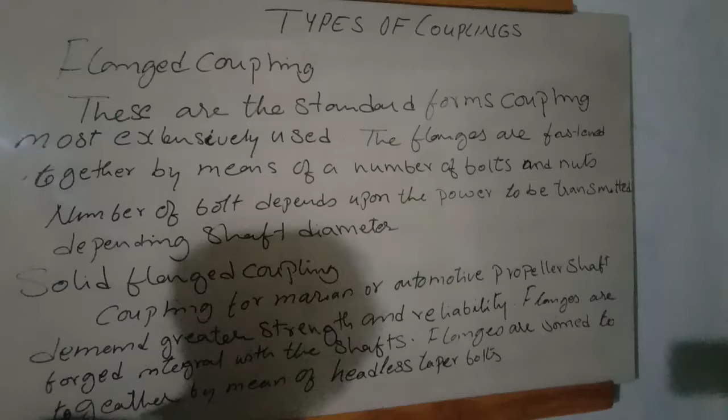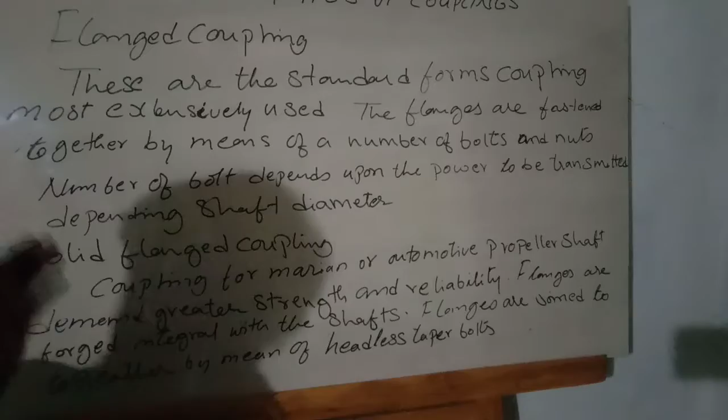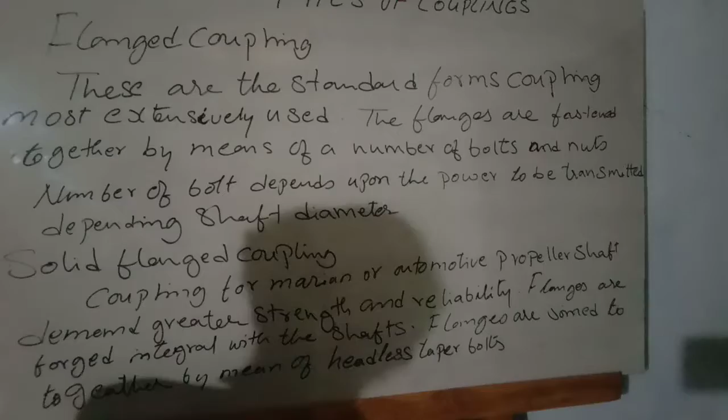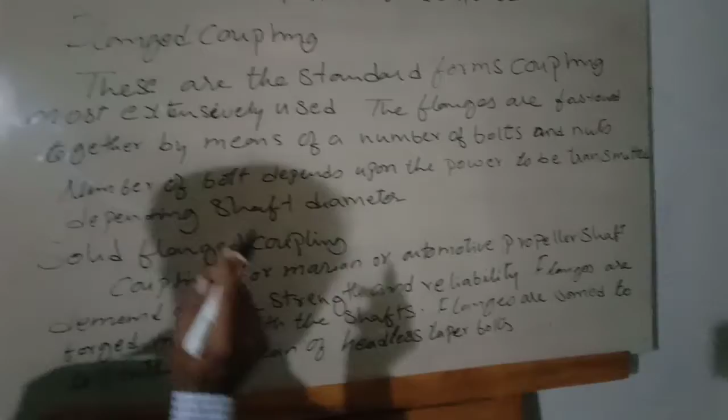Now we are going to learn about the flange coupling. These are the standard form of coupling most extensively used. The flanges are fastened together by means of a number of bolts and nuts. The number of bolts depends upon the power to be transmitted and also on the shaft diameter.

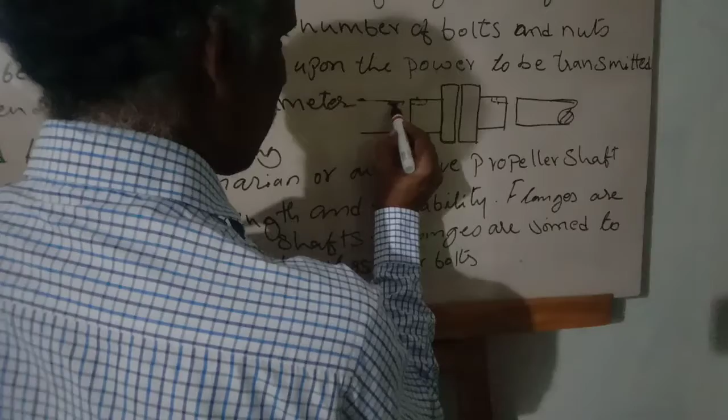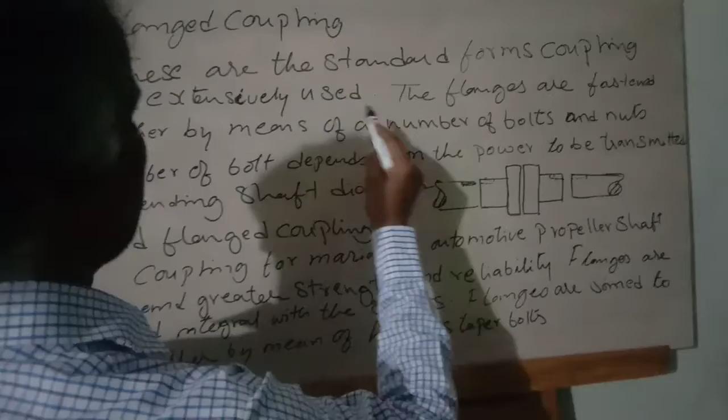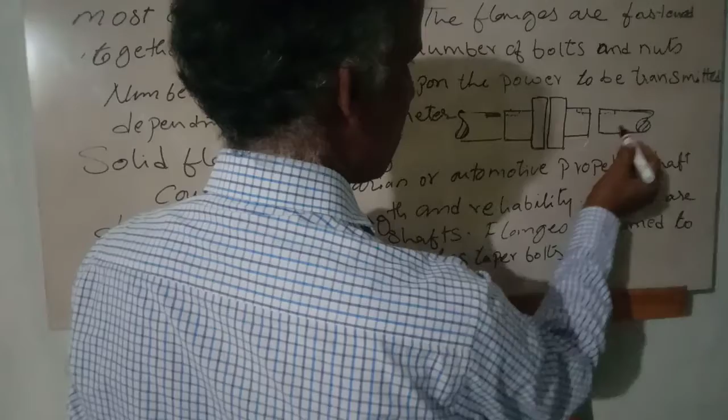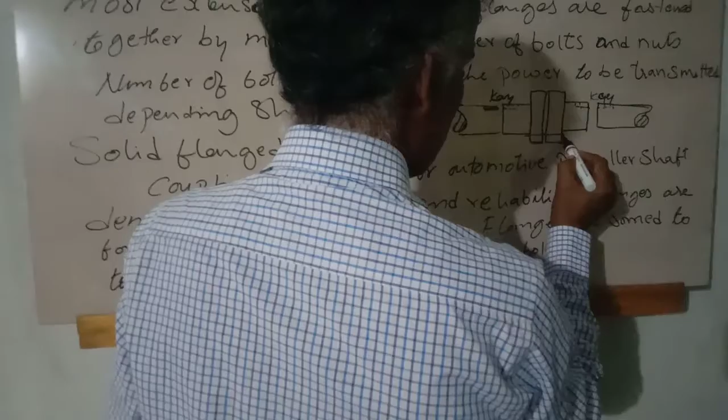This is a flange, the standard form of coupling mostly used. The flanges are fastened together by means of a number of bolts. In the flange, the shaft is inserted. The shaft and the hub run together with the help of inserting the key, here and here also. After inserting the shaft and fixing with the key, the two flanges are fixed by nut and bolt.

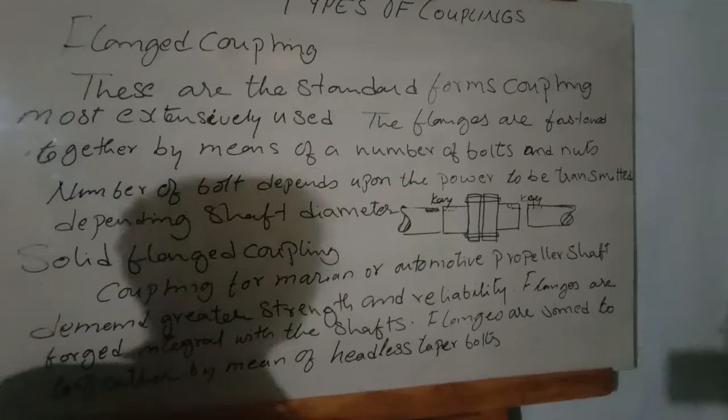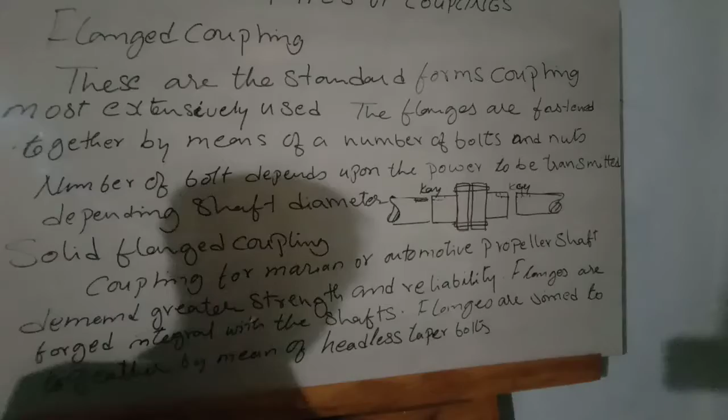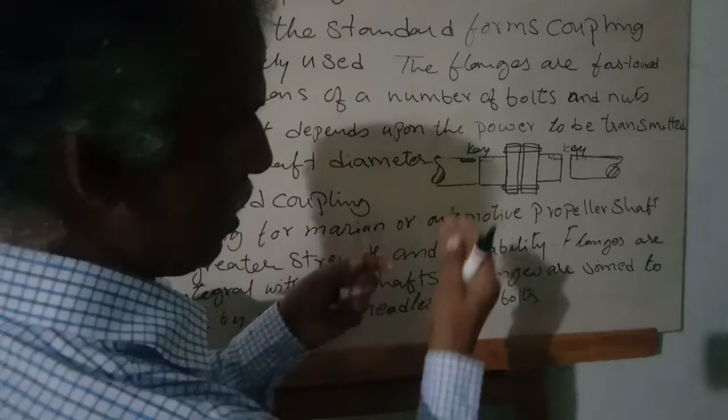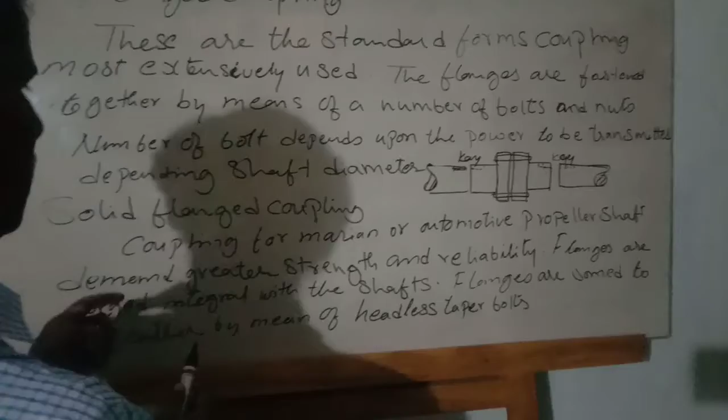Number of bolts and nuts are used. Sometimes they use 6, sometimes 4, sometimes 8, multiple numbers. It depends upon the shaft diameter, power to be transmitted, load, capacity, and the diameter. Keeping this in mind, due to tensile force acting when the two shafts are running, sometimes these bolts are sheared off. If the number of bolts is less, the load will be more on the nut and bolt and it will get sheared off. That's why the number of bolts and nuts used depends upon the power to be transmitted and the shaft diameter.

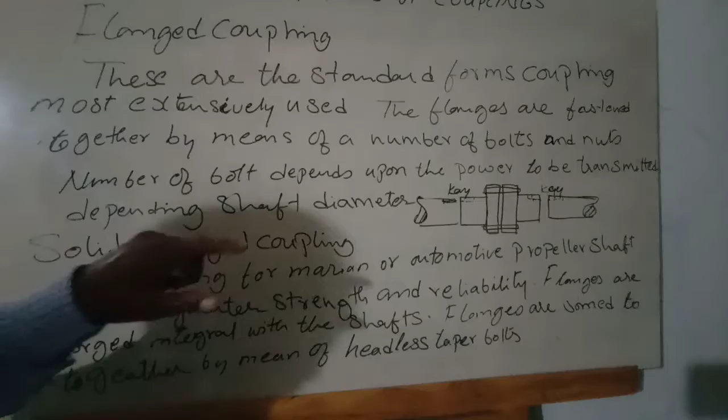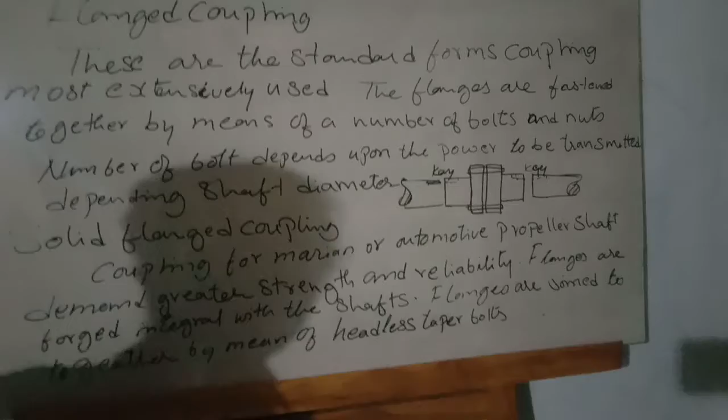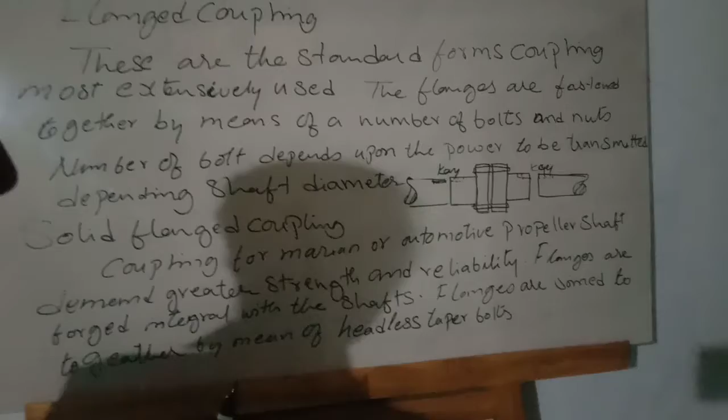This is a flange coupling. Sometimes in this flange coupling they use, in between these two flanges, some synthetic material like plastic, rubber, or leather piece to avoid the sound due to running and slackness, so it will not cause the pollution of sound.

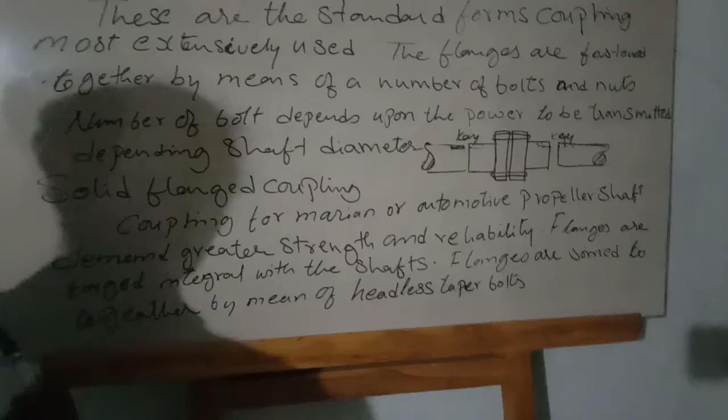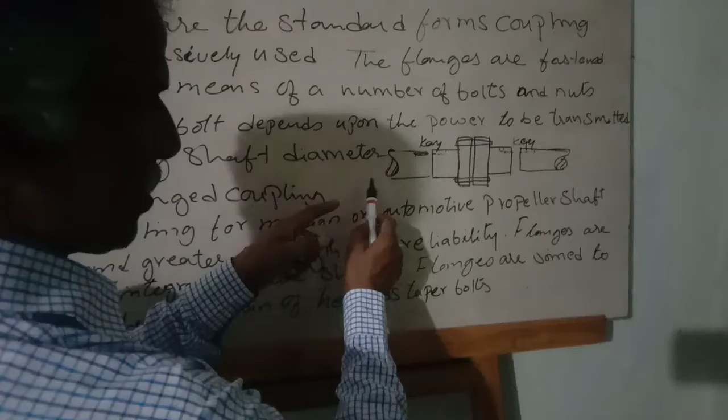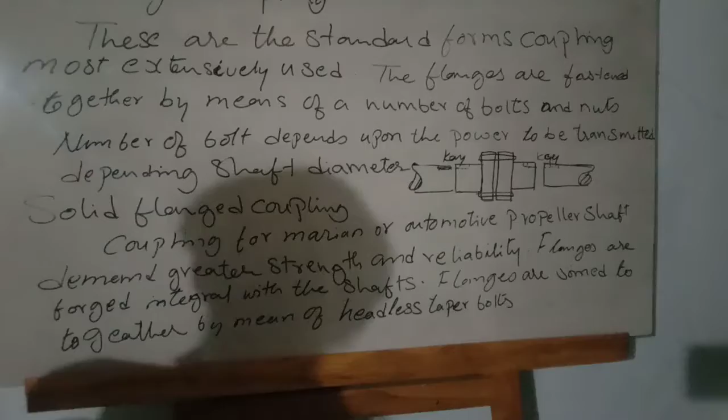Solid flange coupling is similar to this coupling, but whereas in the flange coupling the flange is separate, the shaft is separate, and nut bolts are fitted with a keyway and keys, in solid flange coupling these are mainly used in marine and automobile propeller shafts.

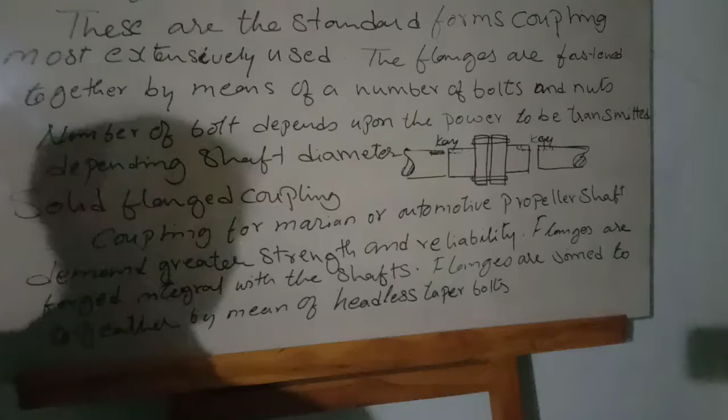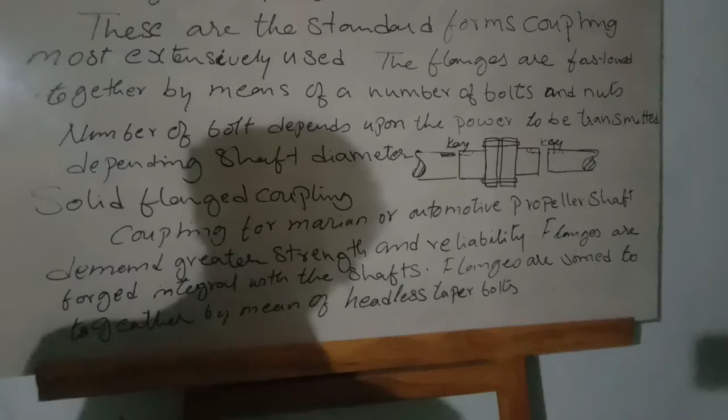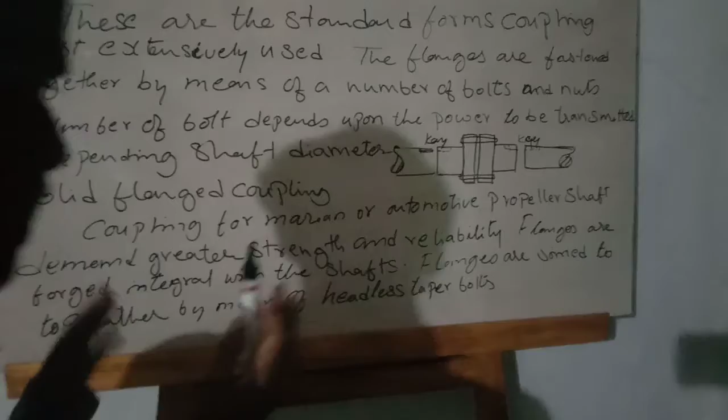Marine means on the sea, ships, big ships and marines. Automobiles, buses, cars, everything - these shafts, two shafts, are coupled with a solid flange coupling with flanges. These flanges are an integral part of the shaft.

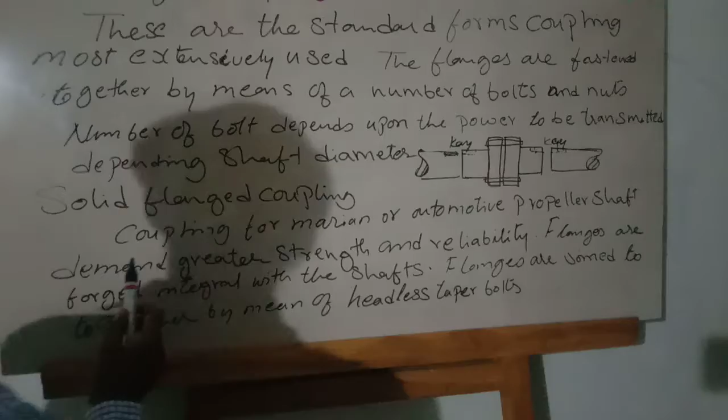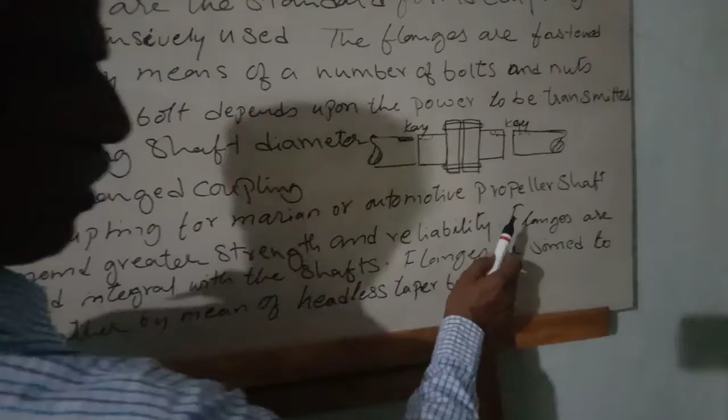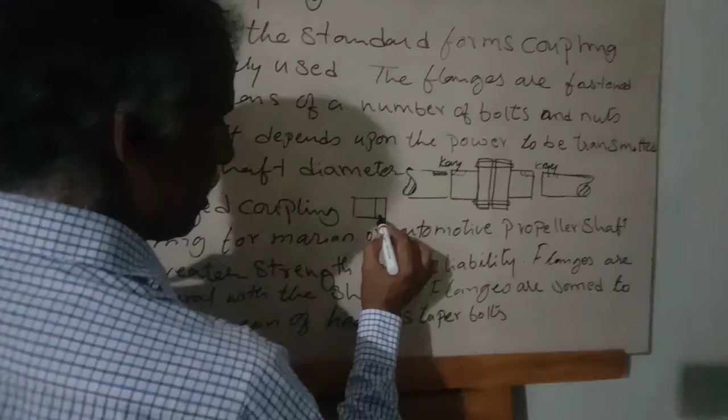Here the coupling for marine or automotive propeller shafts demands great strength. These solid flanges have great strength and reliability. The flanges are forged integral - integral means they take one shaft, heat it, and make it into this shape by forging.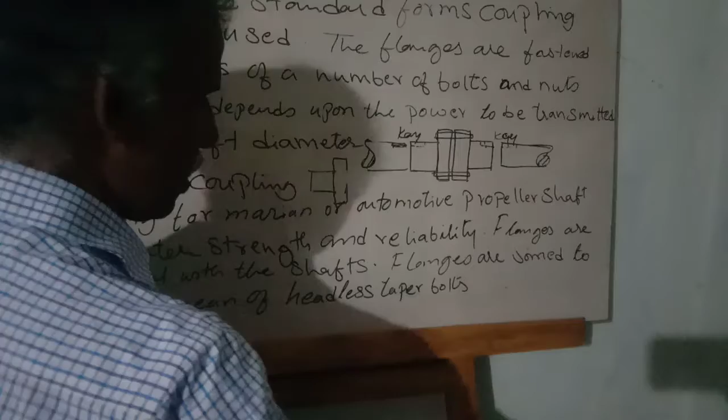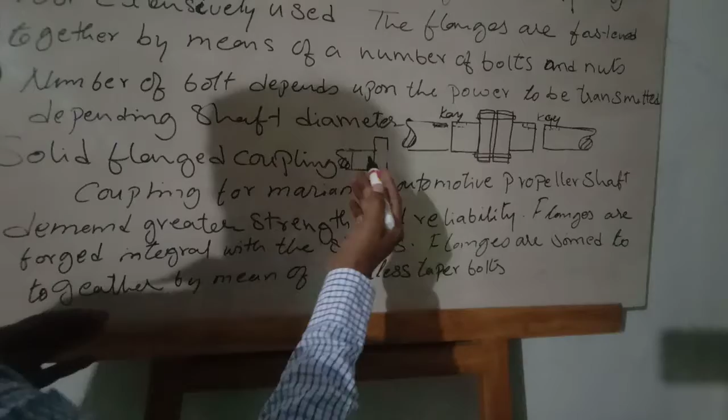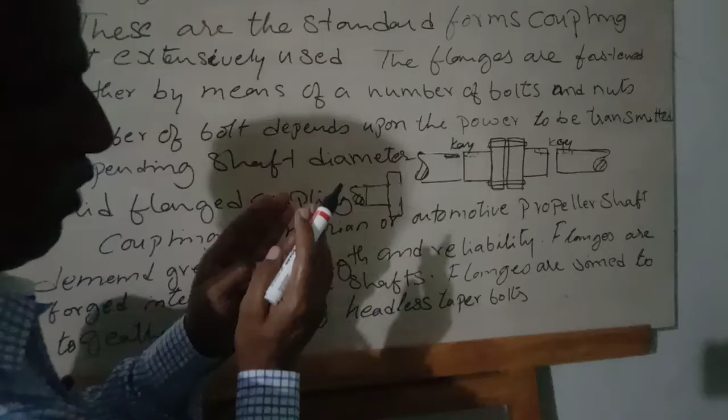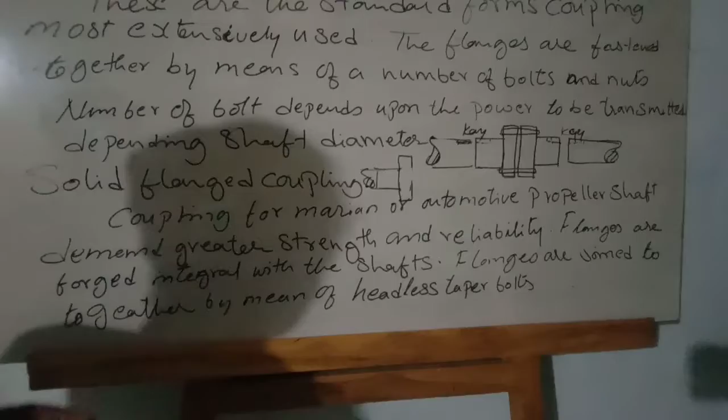So the flange and the shaft are an integral part, one part only. So the shaft is merged with the flange on both ends - both shafts are integral with their flange, both one piece. Now these two flanges are fixed together the same way as in the flange coupling, with nut and bolts. This also depends upon the diameter of the shaft - load has to be transferred, power has to be utilized, depending upon the shaft diameter.

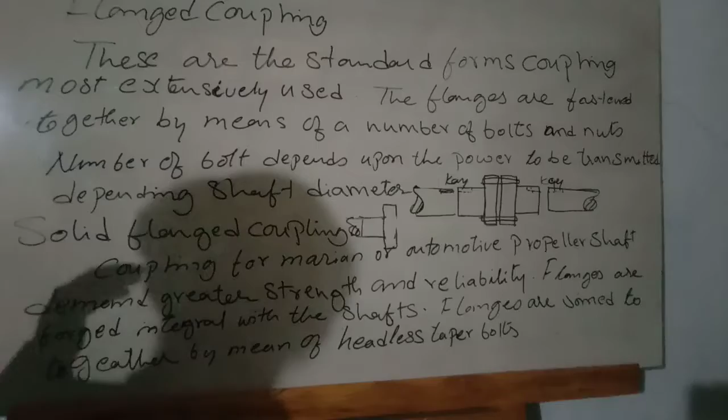Difference between flange coupling and solid flange coupling: in flange coupling, the flange is a separate part and the shaft is a separate part. Whereas in solid flange coupling, it is an integral part with the shaft. The coupling is made by forging.

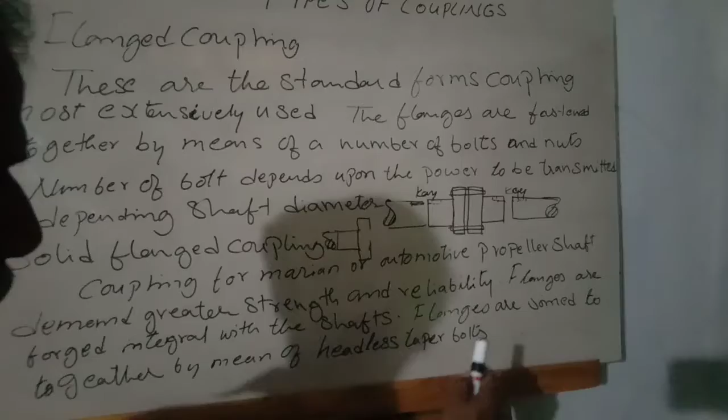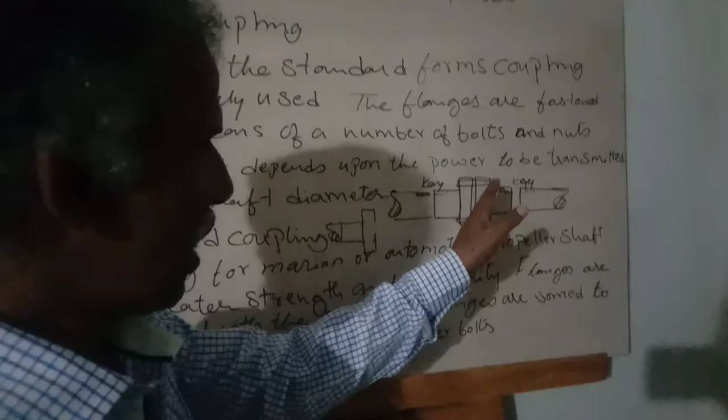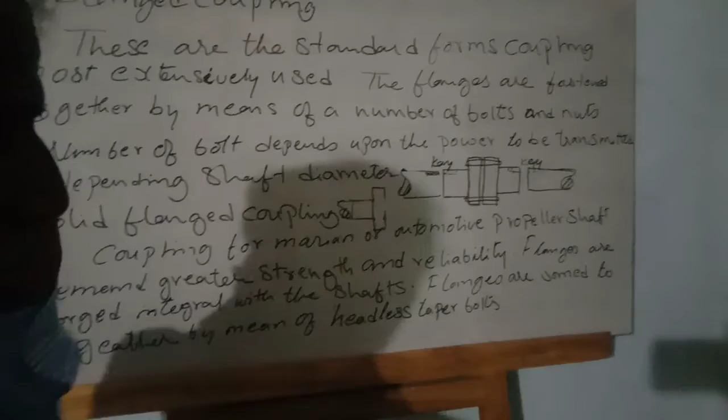The flanges are joined together by means of headless taper bolts. In flange coupling, one side we have the head of the bolt, the other side we fix with a nut. Whereas in solid coupling, we use headless taper bolts, which will be in this shape.

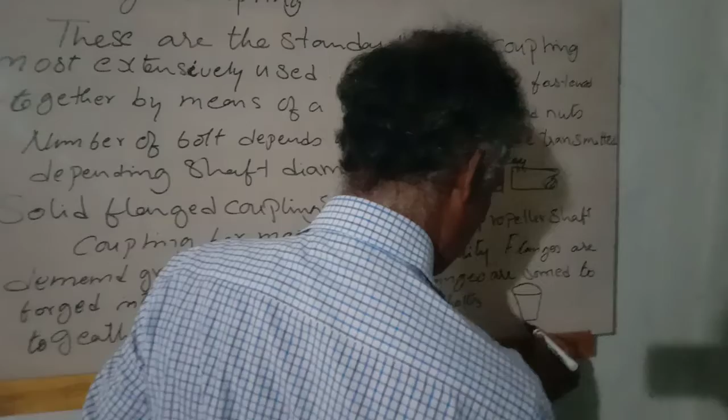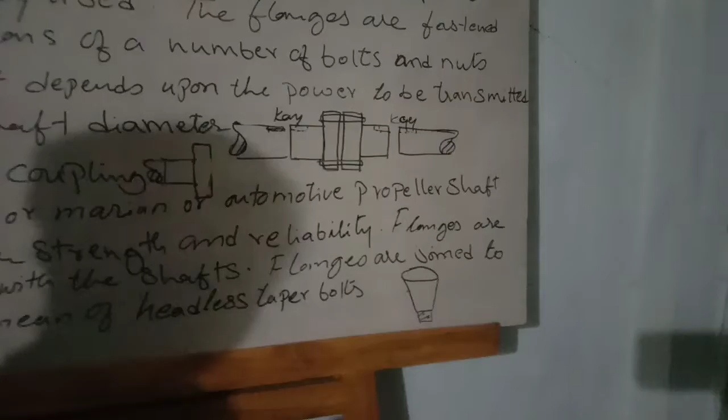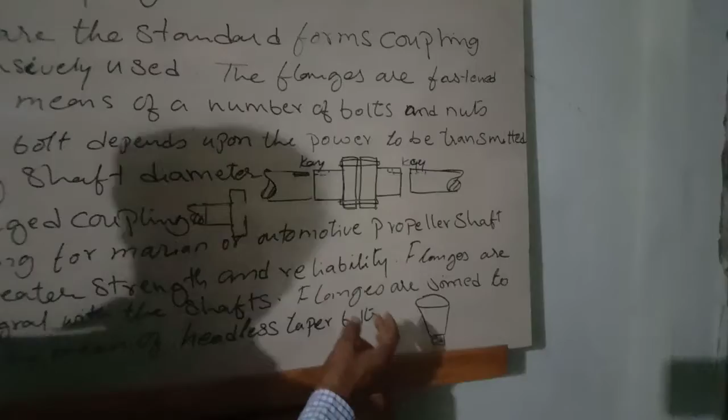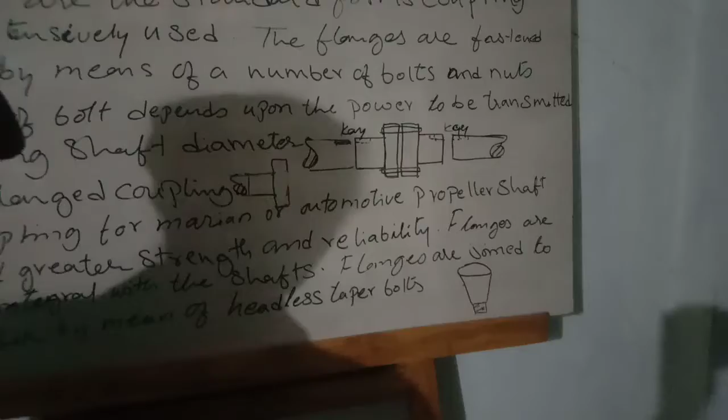For example, in your bicycle, they connect the crankshaft and the pedal with a taper pin. When it becomes loose, they hammer the taper pin and tighten the nut. In the same way, the taper headless bolt is fitted into the flanges and the other end is fixed with a nut. Due to this taper, there is more strength of joining.

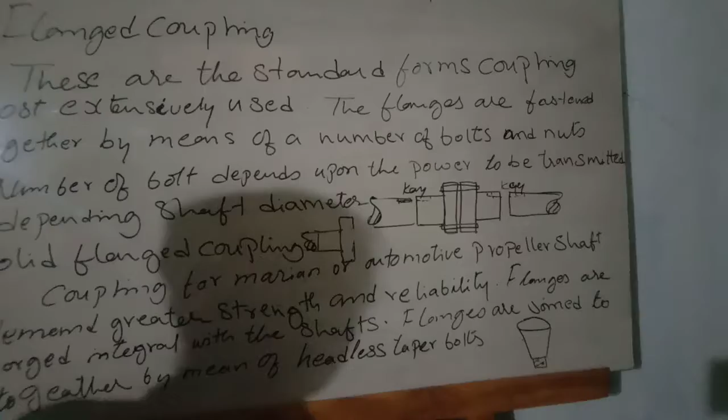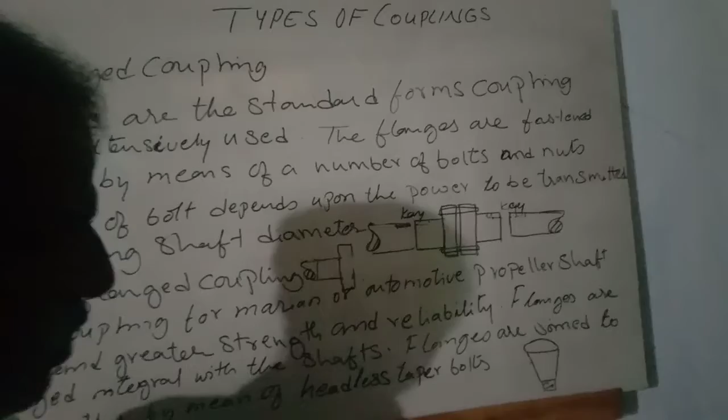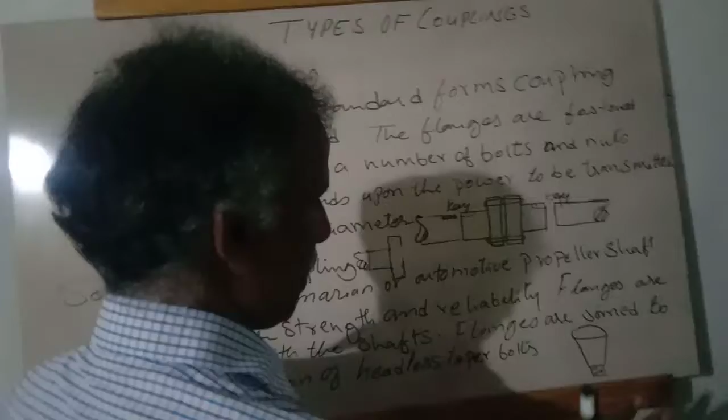For example, when you insert a sleeve into the spindle of a drilling machine, when you fix the sleeve or drill chuck, these two tapers coincide with the same taper, and due to friction it grips more. Unless you dismantle it, it will not open - after removing the nut, you bang it, then only the taper will come out. Whereas with other bolts, sometimes after a long time it may not come out, but this taper has more strength than the other.

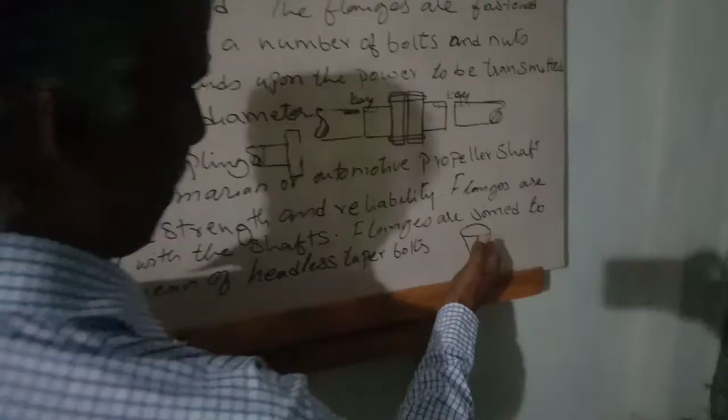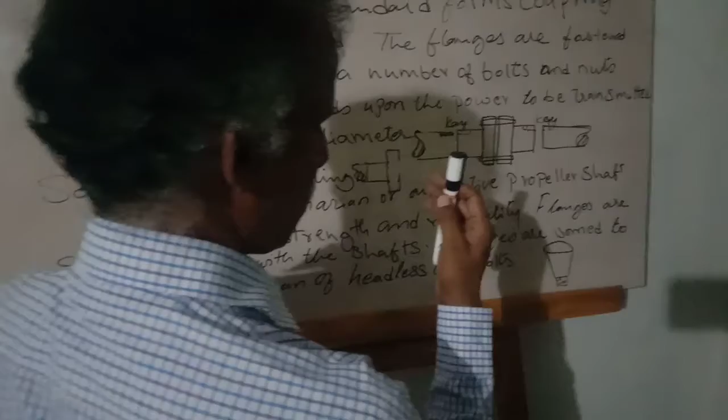And being headless, it will avoid any accidents. The advantage is to avoid accidents. This taper pin has more advantage for fixing, having more friction and more strength of fitting.